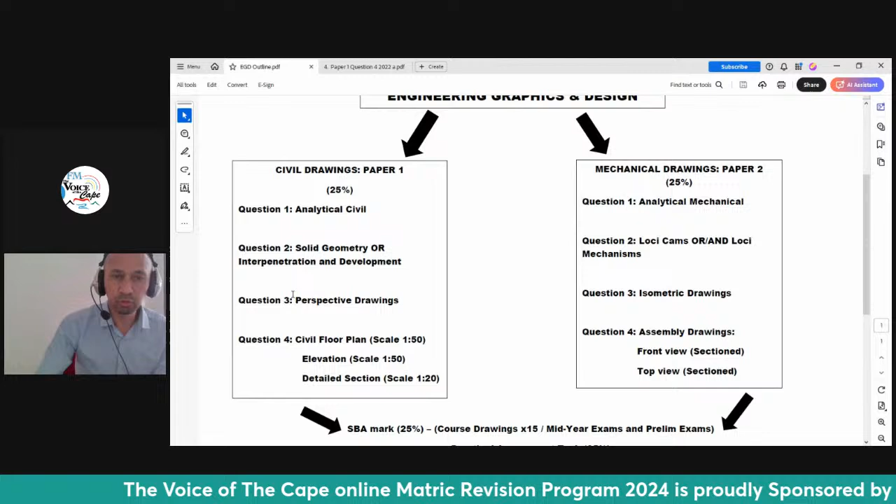All of these sessions we have gone through question 1, question 2, question 3, and we've taken a little bit of time to work on question 4, as question 4 has a magnitude of 90 to 95 marks, which is slightly short of 50% of the paper. And that is the reason why we are spending so much time on this specific one. And you will see that question 4 has 3 parts: civil floor plan, elevations, both to scale 1:50. And today we are finishing off with a detailed section of 1:20.

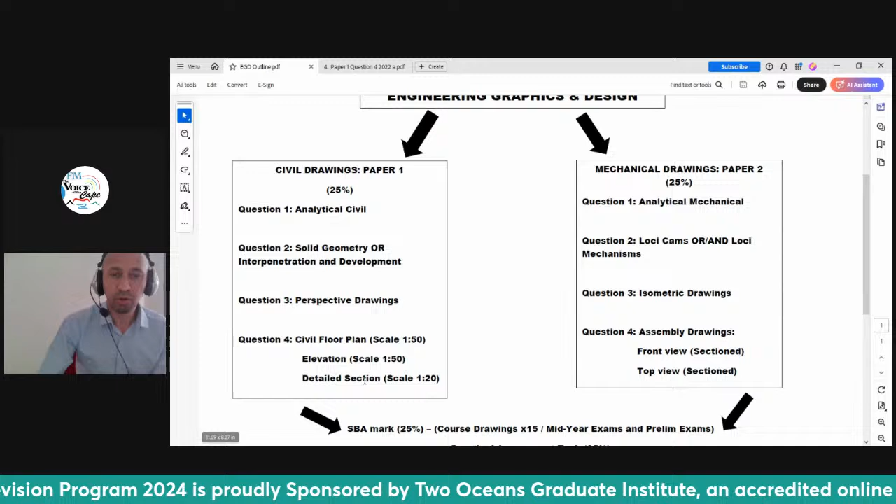One of the parts of this particular question that is normally not very well answered is specifically the roof. And I'm hoping that you will pick up a few tips today to be able to make sure that you complete this part of this particular section of question 4. Okay, I'm going to just move to the question paper that I'm using, and please, if you can download this paper, it is the 2018 paper, which I'm using as an example, and just to revise through this paper to ensure that you are well on track and prepared.

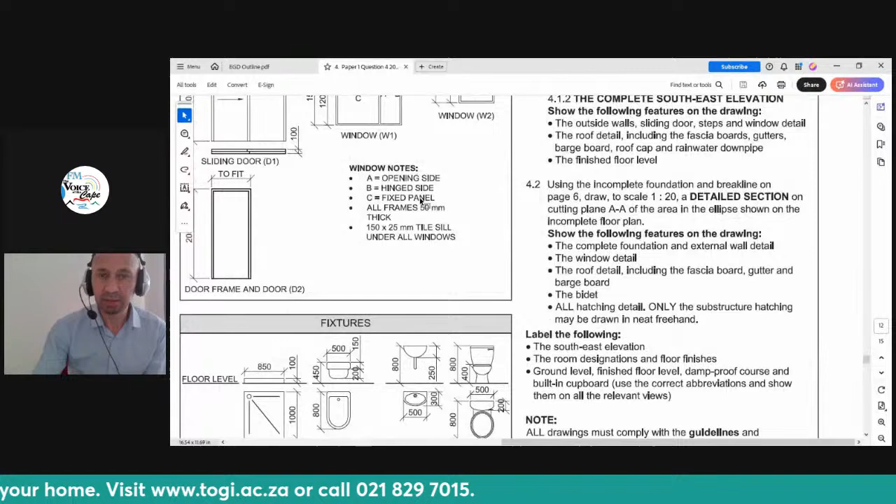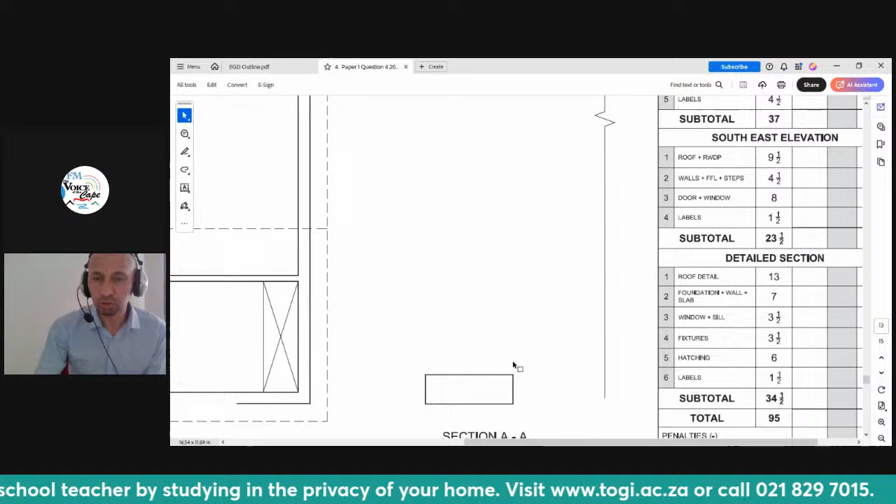Now, you will see that we will be covering 4.2 today, of which we've done 4.1 last week and the week before, 4.1.1 and 4.1.2. Here we have using the incomplete foundation and break line on page 6, and that is going to be the page that you will see right over here. Just to take you to that page, that is page 6. There's the break line. Yes, here's the break line. Sorry, I just want to take you there. That's the break line and the foundation. That is what we are talking about. That is on the page which you are going to draw.

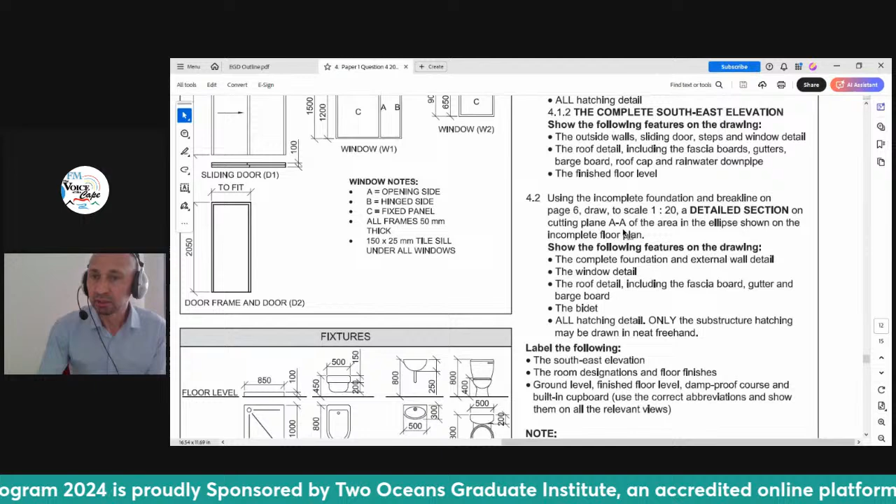And it states further that to a scale of 1:20, very importantly, we have a tendency of making the mistake of dividing everything by 50 because the previous ones are all 1:50, but this one is 1:20, which means it becomes a detailed section on cutting plane AA of the area in which the ellipse is shown on the incomplete floor plan. Now, you can either go and visit this side where the floor plan is, which is right there, or alternatively, you can go down to your actual drawing page, and you need to show everything from this point over here until that point over there.

And the fact that the arrows are pointed that way means that you are standing literally on this side here where my pencil is, and I'm looking, as my arrow indicated, into that space here. So everything in the backdrop here will also be seen, and that is sort of the higher order part of this particular section of the question.

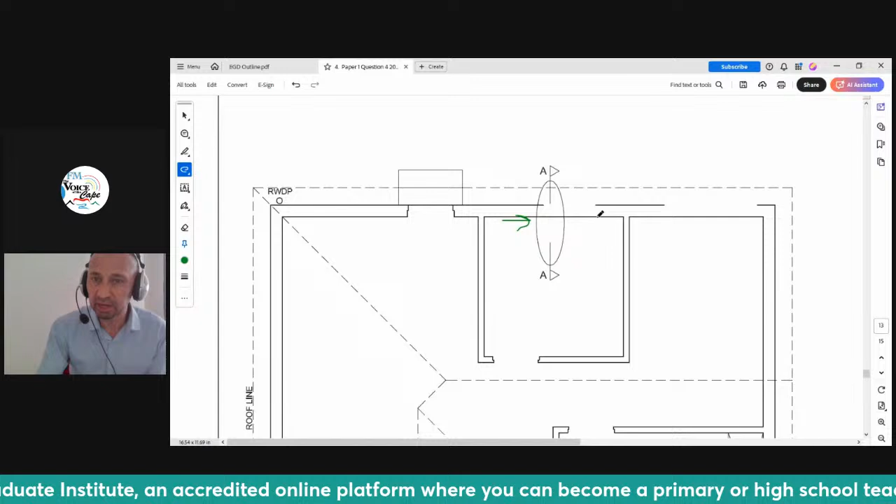So keep in mind, if those arrows flip this side, you will obviously have your movement to the opposite side of the pointing of the arrows to be able to see the view of which you need to indicate from that corner or that point to that point.

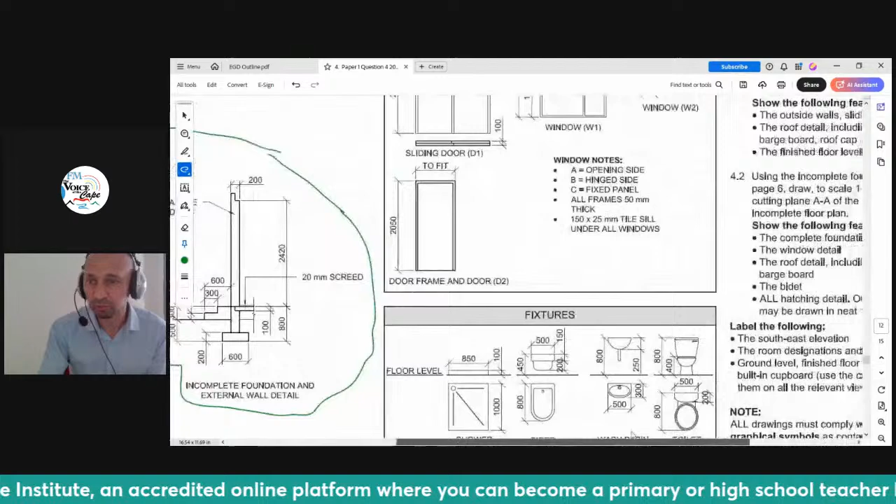Right, so if you go back to our instructions, you will see that you need to show the following features on the drawing, and that's going to be the complete foundation and external wall detail, right? And you are going to obviously start right here with all of that information that you have there and scale that down to 1:20. You need to show the window detail, and the window that it is going to be cut through is going to be window 2, which you will see there.

It cuts through window 2, and you have to go and find where my window 2 is. This is my window 2, so you're going to scale everything down by 20, specifically this drop of the window, right? And then you need to go to bulleted point 3, the roof detail, including the fascia board, gutter, and barge boards. This is a reflection of the roof, which we are going to do. And the roof detail, you're going to find here in your roof notes. So you need to familiarize yourself with that information over there.

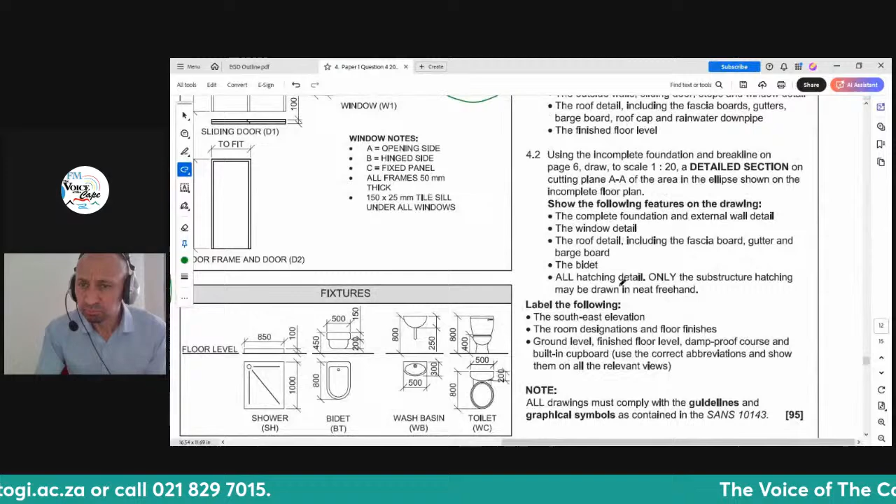Keep in mind that all of these measurements here that you see are real measurements, and that you have to divide it by 20. And then, of course, there will be a bidet in the background. Now, remember last week when we drew it, there was a bidet that you saw here in the backdrop, and that bidet must also now be brought into view because it forms part of the section that you will see there, right? And how are you going to get the bidet there?

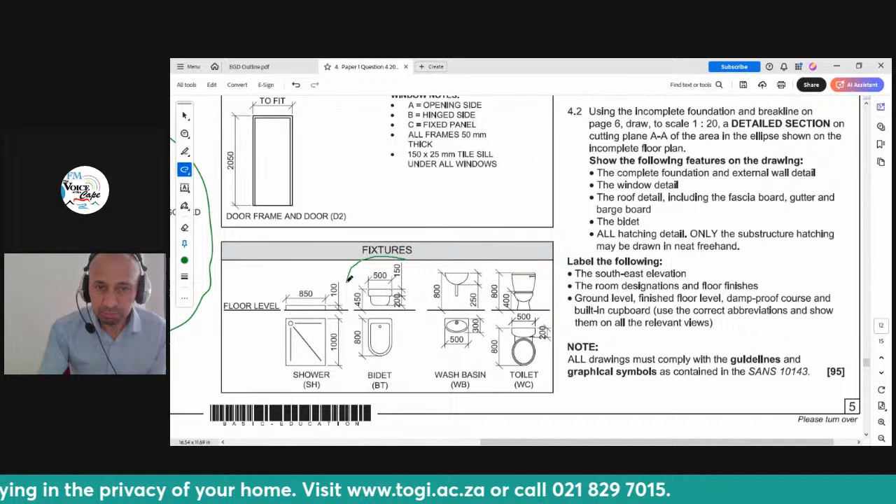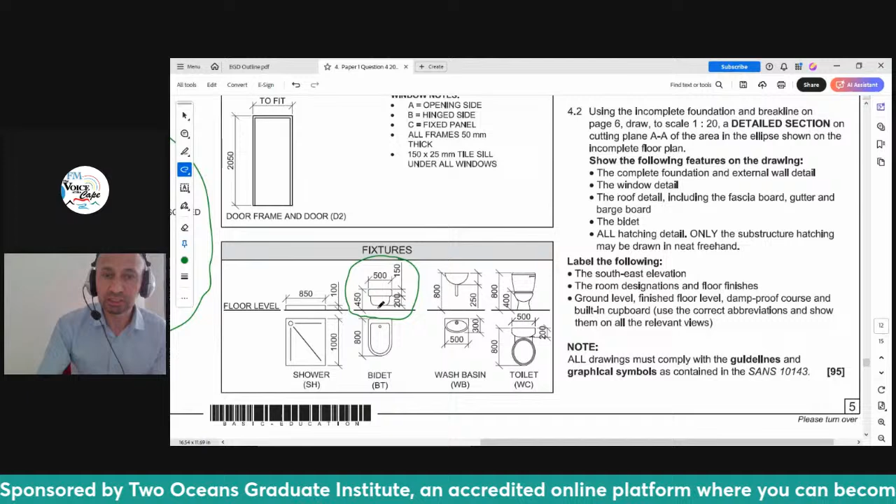You're going to go to your symbols, which you obviously have on your instruction page. Let me take you there. There is your bidet. So we're specifically going to look at that view over there because that shows the elevation of a bidet, not really this view here because that's already part of the floor plan. Remember, these are basically computerized drawings given on this page, but you cannot copy this drawing onto your page because these are not SANS symbols. You need to draw the actual SANS symbol, which I'm going to show you in a while.

And then you need to have all the hatching detail. Very importantly, only the substructure hatching may be drawn in neat freehand, which I will show you as well, right? And then all of that will conclude the detailed section. Now I'm going to stop that screening and I'm going to go over to my workstation, which you are going to see in a moment. And there you will see that I'm busy with my workstation on this side here. I've got my instruction page with me.

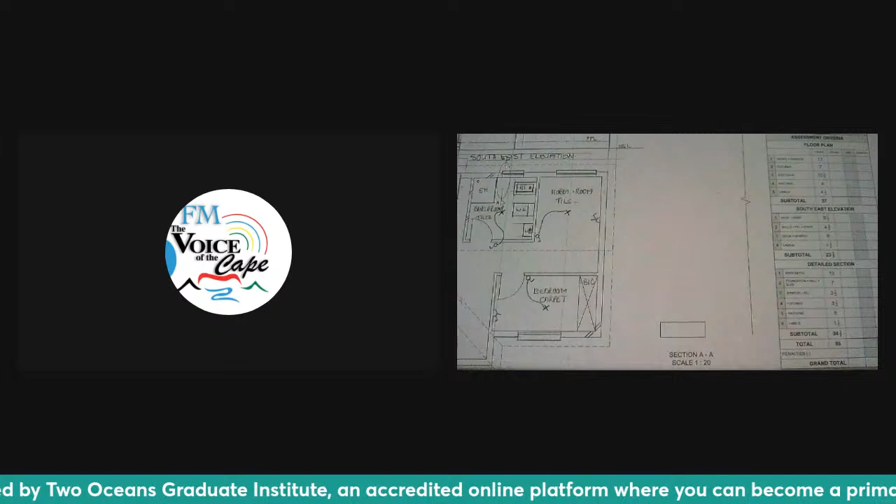The first thing that I'm going to do is I'm going to go to this over here. You will see that this part of my foundation already exists on my drawing. It's a given as a starting point. So I will have to take my calculator and divide all of these by 20 to be able to find the dimensions on this section here, which I need to draw. So what I am going to do is simply do that calculation quickly. And once I've done that calculation, I will be able to draw.

I've already done that. So I'm going to start with my wall. So that is 30 over there. I'm going to find the middle, which is 15. And then I'm going to go 5 on this side and 5 on that side, because my wall is actually 10 millimeters in thickness. I'm going to project that faintly up like that. And then I'm going to go to my different slab layers.

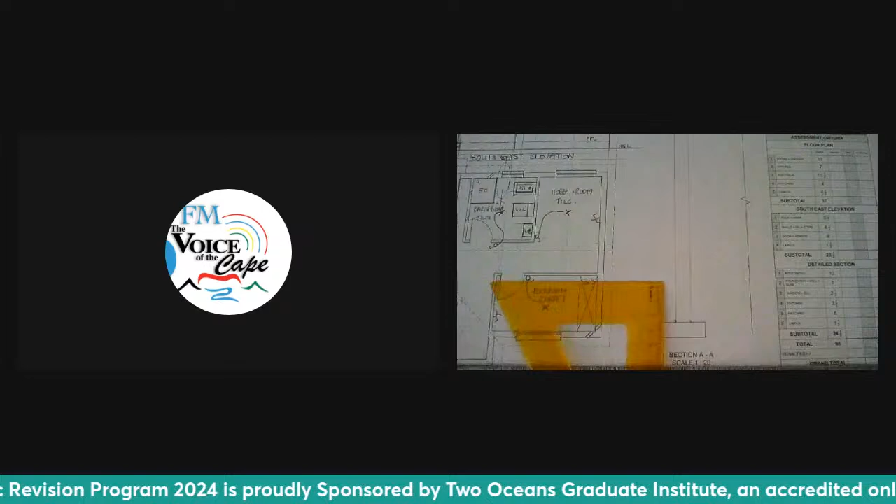I'm going to measure up from here, according to my instructions, 25 millimeters. So there I have my 20 plus my 5. That's going to be my 25 that I have there. And that 25 is going to be my natural ground level, which I will have there. And then on top of that 25, I'm going to measure 15.

And my 15 is going to be there. And there I've measured my 15. Now, what is important to understand is which side is going to be my inside of my house and which side is going to be my outside.

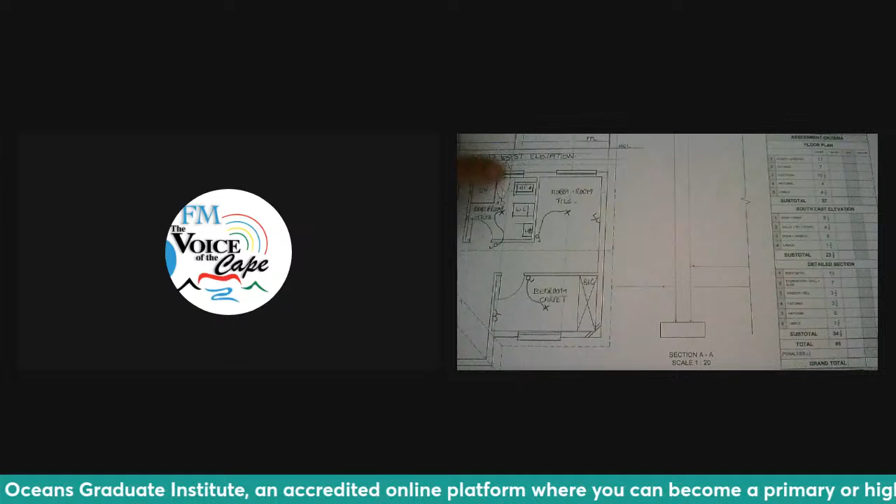Now, if this is your cut section that you see here, my cut section is there. So I'm taking literally that cut section and I'm flipping it like that, meaning that this part here is my inside, which is on my right-hand side here. So that's going to be my inside of my house. That's going to be my outside. So the inside of my house will have my floor finish with my different layers. As you can see, it develops here. The outside will only have my natural ground level as it is there.

And then I will have my slab according to my instructions. I'm going to go down with my slab. My slab is 5 millimeters, scaled down by the 20 scaling that I have. And you will see significantly that my slab actually goes halfway into the wall. So I'm going to put that halfway into the wall. Now I'm going to darken that slab.

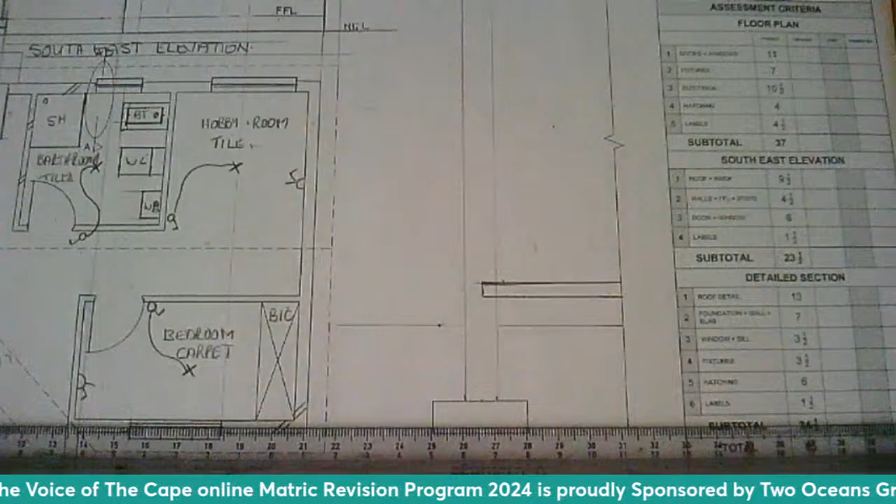Right, and I'm drawing as fast as I can because in the exam, neatness, unfortunately, is not a factor. We don't look at neatness. We look at accuracy. It doesn't matter if your drawing is not 100% neat. Accuracy is the most important thing. If you're going to focus on neatness and erase, you are going to waste a lot of time.

Of course, on top of that, there we will have screed of 1 millimeter apart. That is my screed that I have there. And then on top of that concrete slab, I'm going to have a thick line which forms my DPC. And remember, I'm going to write DPC there because I know that is my damp-proof course. Then I'm going to highlight my natural ground level, which I have here on both sides of my wall. And while I'm at it, I'm going to label that natural ground level as well.

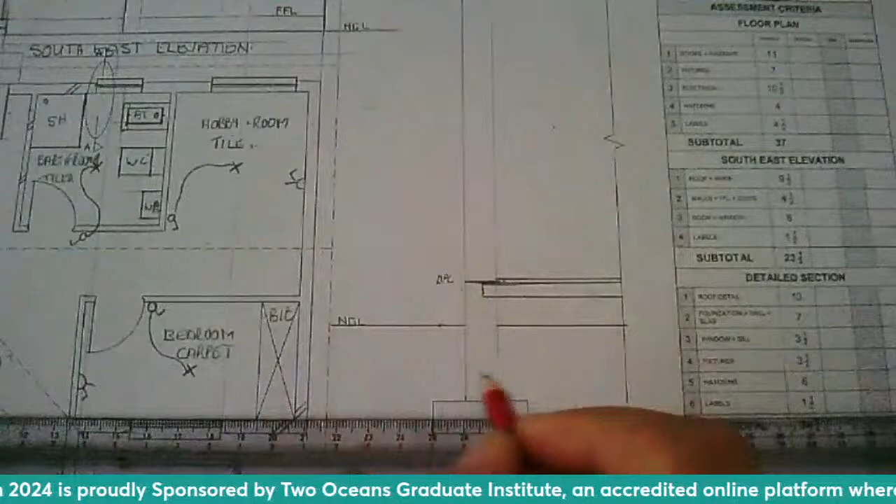Now, that forms basically my foundation. Now, while I'm at it, I can actually hatch that. So what I normally do is use my set square, but you don't need to use a set square. You can actually do it freehand, but it looks neater for me and more accurate when you do it with your drawing equipment, but nothing prevents you from drawing it freehand as indicated in your instruction page.

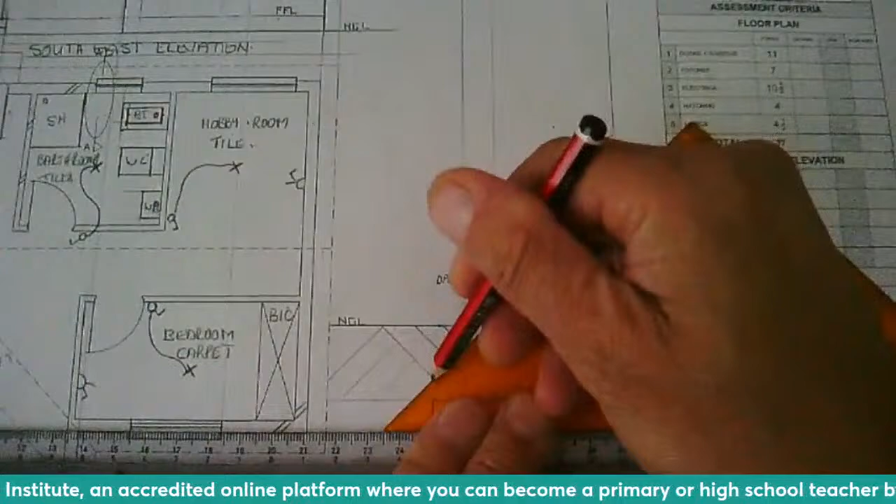So my earth is going to have lines going at 45 like that, and then it goes to the opposite direction, 45 like that. Now that's going to earn you a mark, and if you do it on the inside, 3 lines evenly spaced apart. We're not very pedantic as to the space of the lines, but you must keep it consistent once you start. So that's going to give you a mark each, on both sides of the wall. You will see my wall still remains faint because I need to add some detail on top, and once I've done that, I will darken my wall.

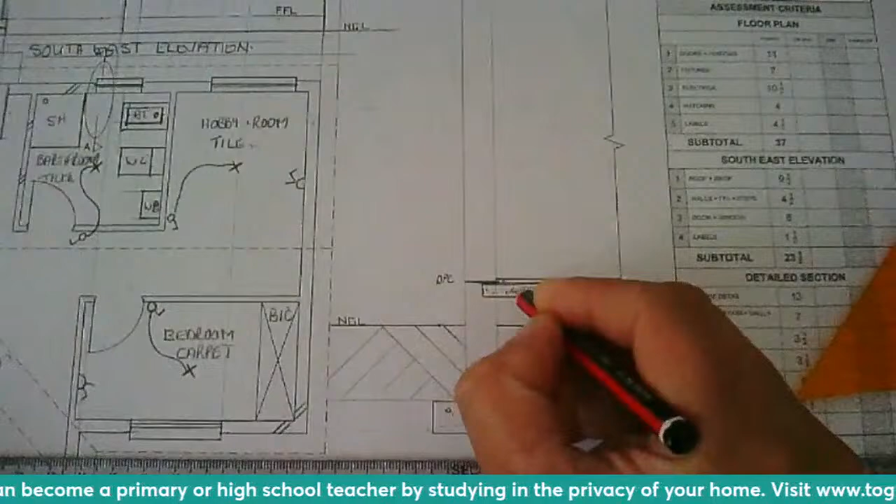And then, of course, my concrete would just be dots and triangles in the exam. So you can have a few triangles and dots. That is also concrete. So that will earn you the mark for hatching. Then you have your compacted hardcore. That's going to be 45 up, 45 down, 45 up, 45 down until you reach your break line, which is this line over here. Okay, that's your break line. So there I've got my compacted hardcore hatching.

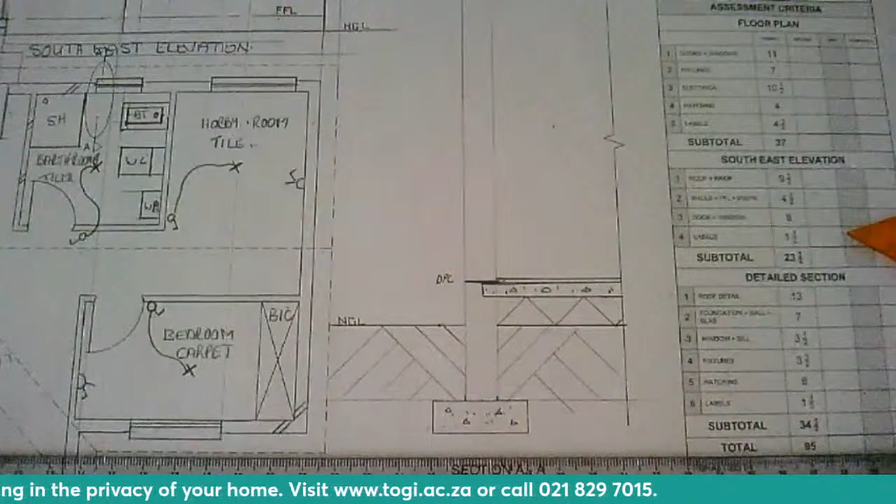I have my slab and I have my concrete foundation hatching in there as well as my earth on both sides of my wall. That section of my substructure has been completed. That is the one part which forms my foundation of my detailed section. What I'm going to do next is move up and put in my window which I'm cutting through. So I'm just going to move this slightly up like that so that you can see what I'm doing.

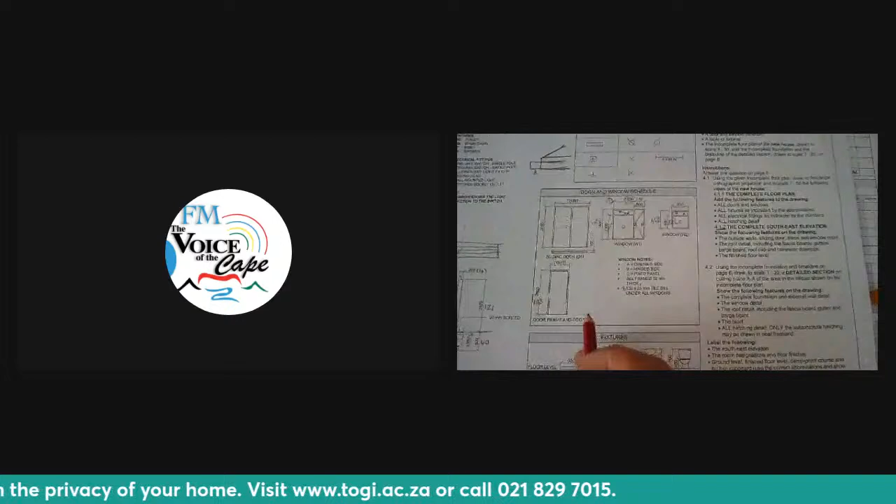Right. Now, when I look at my instruction, it tells me that there has to be a window in here, but how high is the window? Because on top of my window, you are going to see that there's going to be a lintel, and lintels appear on all doors and windows. But how high? What you need to do is to go to your window and door schedule, because your height of your door and your window would be the same.

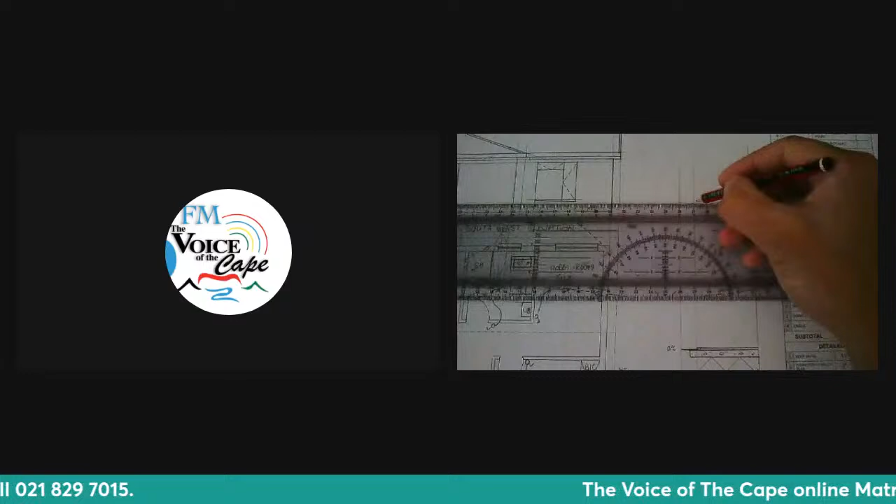So if you look at your height of your door, it's going to be 2050 divided by 20, which is going to give you 103 millimeters. So on top of my finished floor level, I'm going to measure 103. So 103 is going to be right there. I'm going to mark it and I'm going to draw a line faintly there. I just want to extend this a little bit faintly to the top. So you are going to see now, grade 12s, that is the top of my window, or if you have a door, that's the top of my door.

On top of that height, you're going to have your lintel, which is going to be 200 by 80. Now the 200 would be across here, which divided by 20 will give you 10. And 80 divided by 20 is going to give you 4. So all you need to do is to measure 4 above that lintel, like that. And you need to create the top of that lintel.

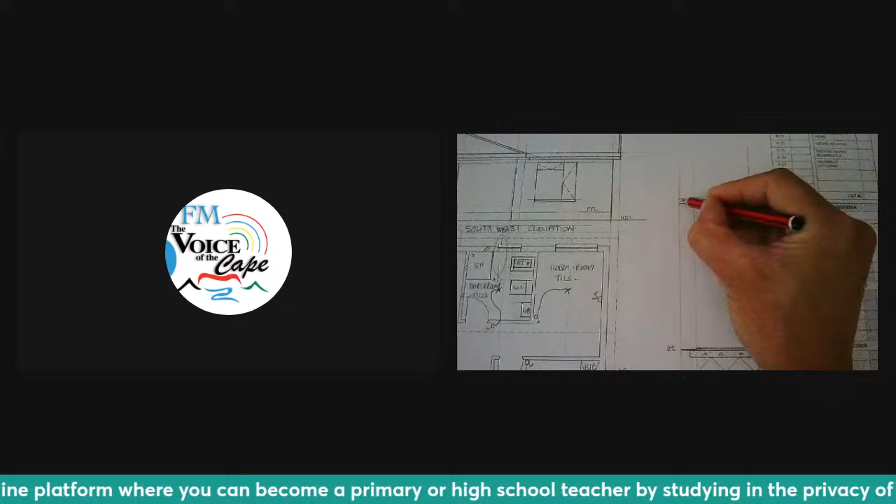The lintel would normally split in half. In some cases, it's one thick lintel. In other cases, it must be split in half because it's 2 lintels that will cover over the opening of a door or window in a load-bearing wall, which is a double wall. So they are split in half. And remember, the lintel is also made of concrete. So you are going to have dots and maybe 1 or 2 triangles in there, which will give you the hatching mark for that specific section.

Then you, of course, know that this is the window that you are cutting through, which is window 2, which you've already established there. And you need to just find the drop of the window, which is 900 divided by 20, going to give you 45. So the drop of the window will be under the lintel, drop 45 millimeters, which is there. I'm going to draw a faint line, just there. That's my drop of my window.

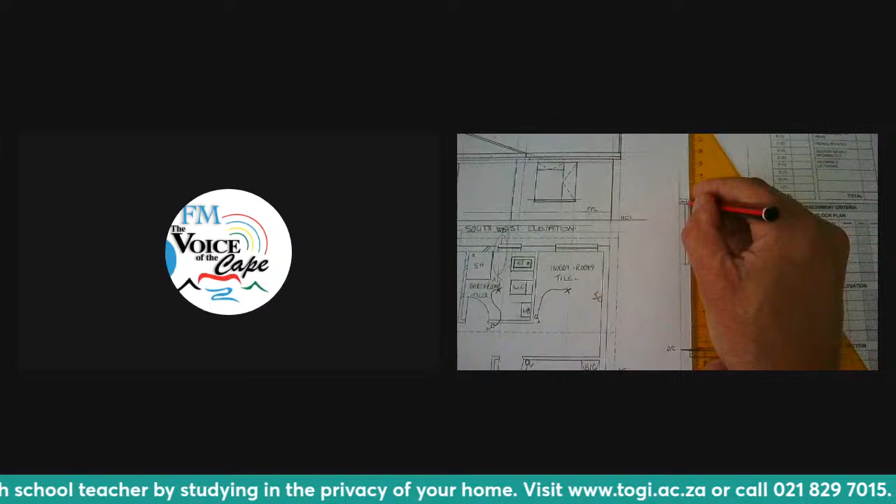But I need to indicate my window frame. So I'm going to draw 2 lines in the middle of my wall. Now, there's no specific measurements for the window frame, but it has to be perfectly in the middle of the wall, which will indicate your window frame. And then, of course, this is the outside. So a window has a window sill here, and it has a window sill on the inside. The window sill on the inside will just be the line that you will see there. But the window sill on the outside is a little slab that you will find the detail of right there where it says window notes.

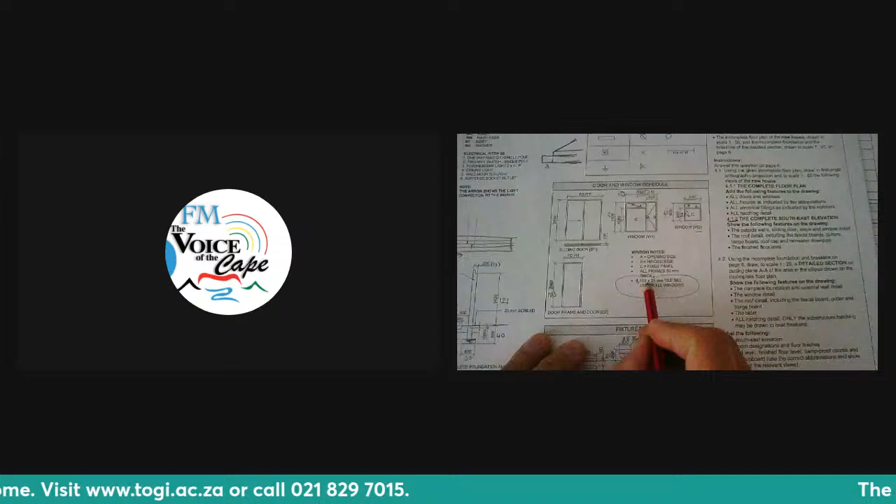So you will read 150 times 25 millimeters tile sill under the windows. So with the real measurements, you need to divide that by 20. 150 divided by 20 is going to give you 7.5. We round it off to 8. And 25 divided by 20 is going to give you 1.25; we can round that off to 1 millimeter because it's less than 5. And the angle that you're going to be drawing it on is going to be 30 degrees. Now, please pay attention how this is drawn.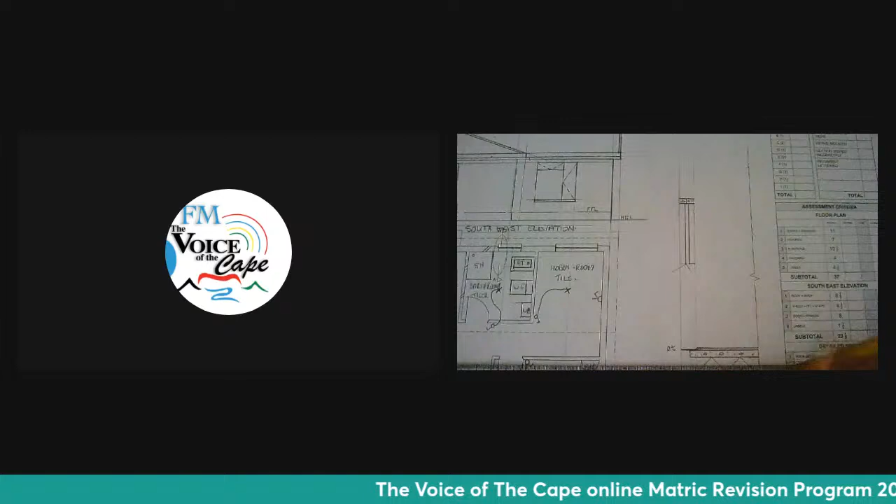So I'm going to go to the outside line of my window frame, and I'm going to draw a 30-degree line like that there. Because that's 30 degrees, I can flip my set square like that and draw a 90-degree angle at that specific corner. And then you are going to have your 8 millimeters to get your length. So there's my 8. It slightly surpasses the window. And this side, I'm going to have my 1 millimeter, which is going to be right there. And now simply, I can just draw my window sill and complete that by darkening the top and bottom and front and back, right?

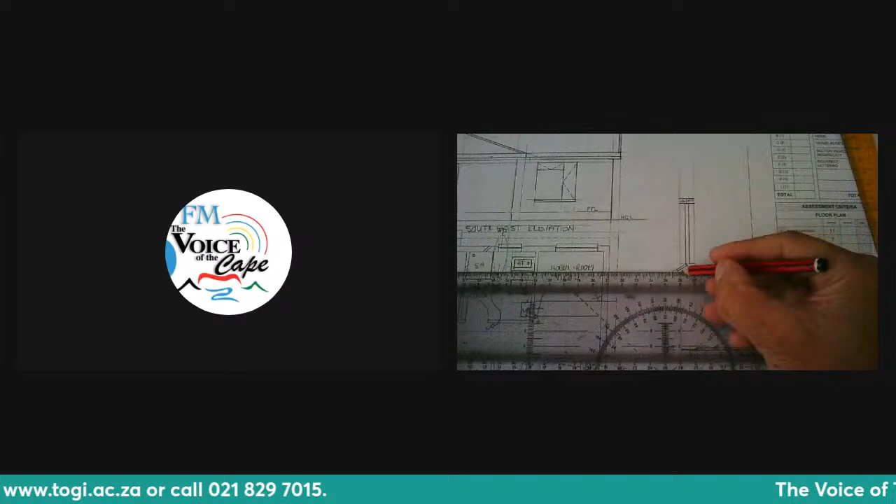And then once I have that, where the window sill crosses the wall line, I'm going to have a line going back there, and I'm going to have a line coming down like that, like a triangle. And I'm going to darken that. And why do we have that? That is the section where you are going to have concrete which mounts the windowsill to the wall. So in that little space, you're going to have concrete as well.

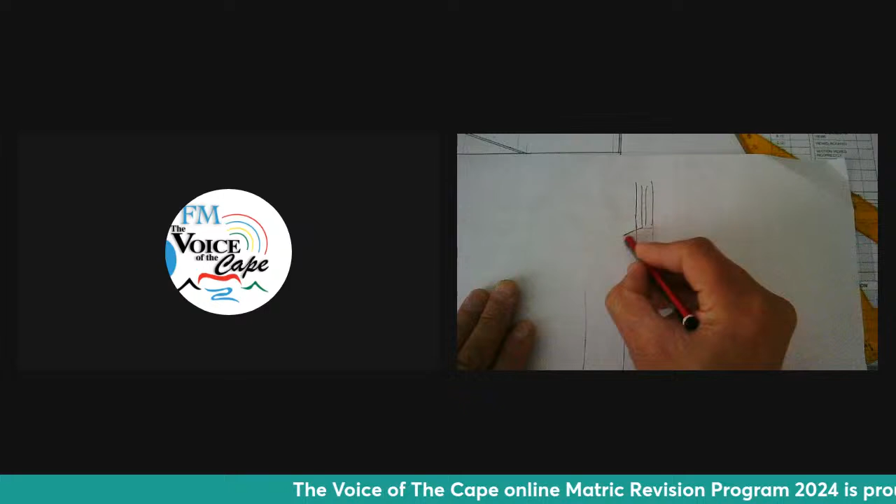But I just need to zoom into that section to show you what I was doing. So if that would be the window, right? And that is the windowsill that we have there. Then I draw a 30-degree line like that and a 60-degree line like that.

I add my 1 millimeter and my 8 to form my windowsill. And then I draw a line from there that way and a line down like that to form that little triangle that you see there.

So if you zoom in on that, this is what you see. That is your inside windowsill there. And you will have concrete in here, which must be done with dots and a triangle to give you the hatching mark. So that is basically what happens there.

Now you have concluded the window, so you can add your little dark lines there and just highlight what you still have faint. I will now slightly darken this up until the window top part, which is where my lintels are. So I'm going to draw that down like that there, and I'm going to draw that down, jump over my concrete surface bed, and just continue like that.

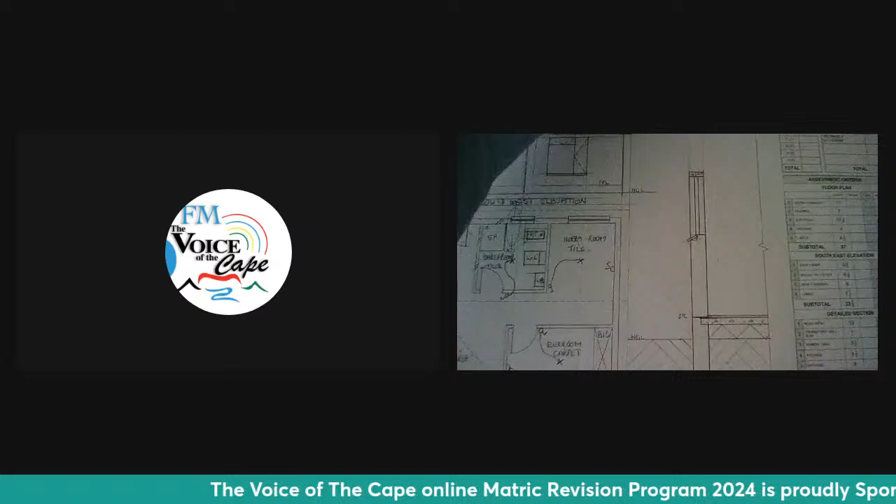So you can see now that is my wall. It's taking shape. I've done my window. I haven't done my hatching yet here. I'm going to leave that for a little bit later. And now the most important thing is that I have to put in my roof structure.

Now, this is very important how you're going to do the roof, because many learners don't actually attempt the roof in the examination, and very few of those who actually do get it spot on. So if you haven't tried this before, this is an ideal way of getting an understanding of how to interpret the roof.

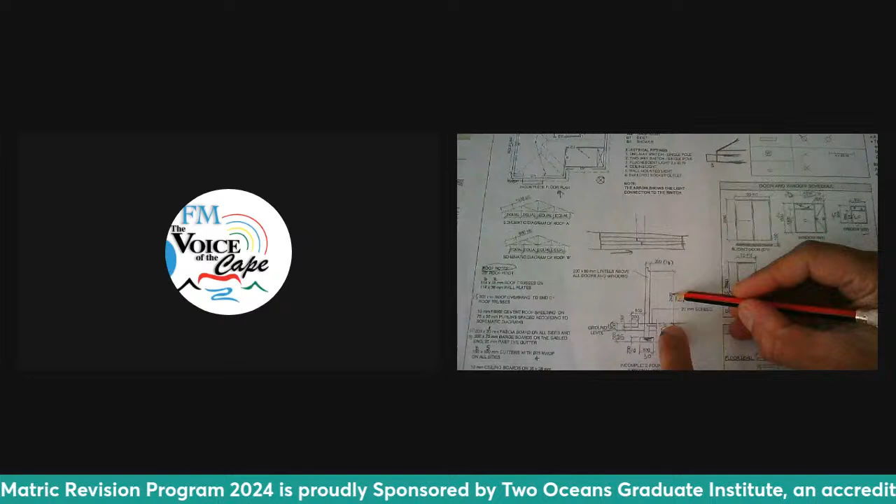So the first thing that I'm going to do, you need to get your height. You need to get this height here, which is from the floor finish, 2420 divided by 20 will give you 121. And that will form that part there. So 121 from my floor finish is going to be right there: 120, and 121 will be there. So now, by having that line, I'm going to draw a faint line till there. That's the first line I'm going to draw.

I'm going to zoom in on that section over there so that you can clearly see what I do. So that is my bottom line. I'm going to have a wall plate section into my wall here. Now, you will see that they speak about the wall plate in this section here. The wall plate is the piece of wood where the truss is basically situated on. It is the layer between the top of the wall and the bottom of the truss. And it is very similar to the wood of the truss, which is 114 by 38.

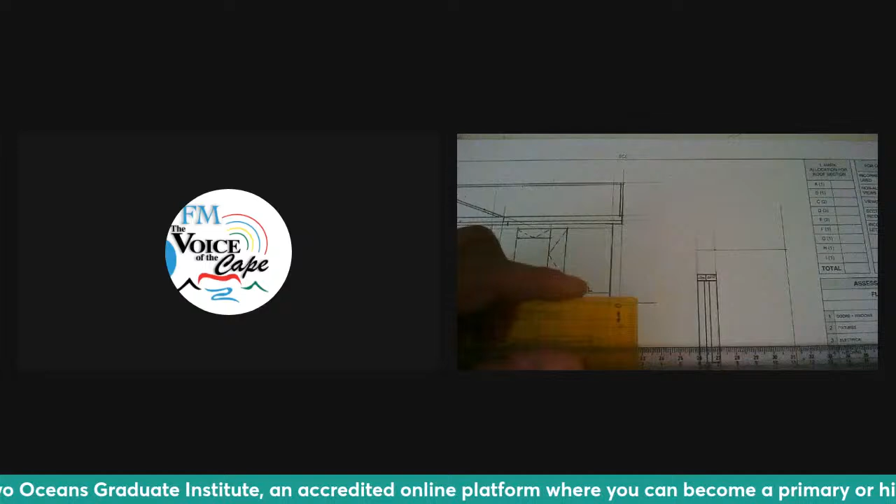So if you divide that wall plate, which is going to be situated right here, it's going to be 2 millimeters up. It is standard measurements, a standard procedure, which basically means that if you follow this before the exam, you can go in with preconceived knowledge and just execute the exam. So that line is my height line. On top of that line, I'm going to measure 2 millimeters there, and I'm going to draw another line right through. You will see I drew it right through.

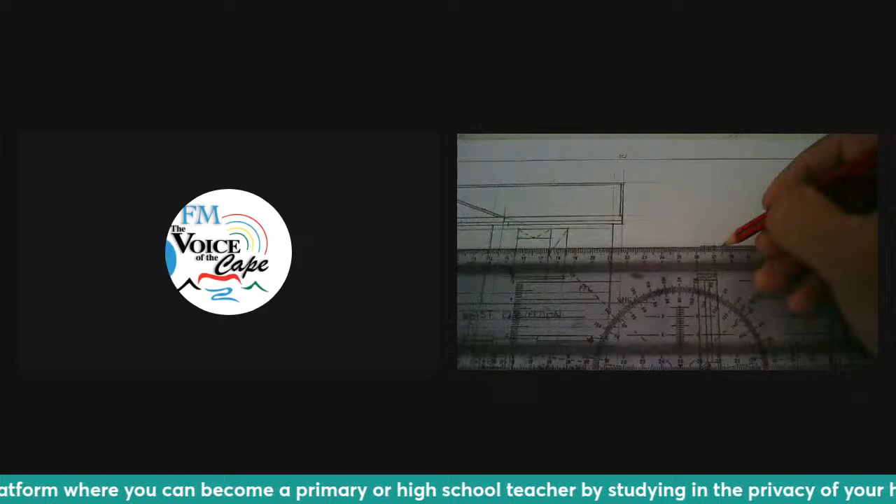And then from the inside of my wall, I'm going to measure 6 millimeters back. And that 6 millimeters that I'm measuring back will form part of my wall plate. So I'm darkening the top and bottom of my wall plate, right there. That is a piece of wood that is situated on top of my wall. So I'm going to darken my wall till there. So there you will see, that is my wall plate there.

And the hatching for wood is just a cross. And there I'm drawing it with a cross inside my wood section. And you're going to get a mark for that as the hatching for wood.

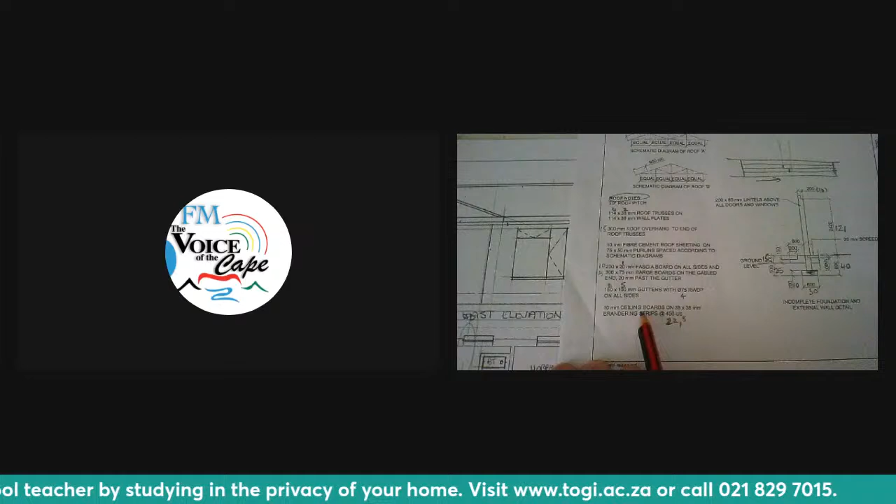Now, the wall plate and the brandering. If we talk about brandering, that's the wood strips that actually keep the ceiling up. The ceiling board is nailed to the brandering strips, right? And the brandering is 38 by 38. If you divide that by 20, you're going to get 2 millimeters by 2. So it's a square piece of brandering. And where does it fit in? It fits into this space here, into that gap there.

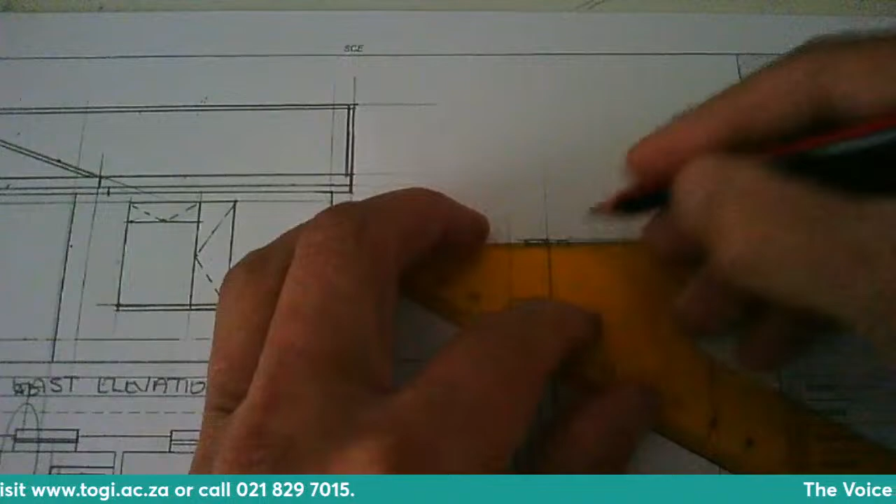So what you need to do is to create the first brandering. I'm going to draw my first line any distance away here from my wall, and then I'm going to measure 2 millimeters, which is very small detail, and draw a line there. And now I can just darken the top and the bottom of my brandering. And remember, I'm going to cross that because that's my hatching.

There I've got my first brandering. Right? Now that brandering needs a partner. You need to show 2 brandering strips, at least, only 2, because 1 mark will be for the brandering and 1 mark will be for the space in between. And they give you the space here. You just need to go and read it.

They say 10 millimeter ceiling board on 38 by 38, which is now 2 by 2 brandering strips at 450 cc, center to center. So the next brandering strip is going to be 450 divided by 20, which is going to give you 22 and a half. And you can round it off to 23, and I'm just going to measure from the center, the crossing to the crossing, which is 23.

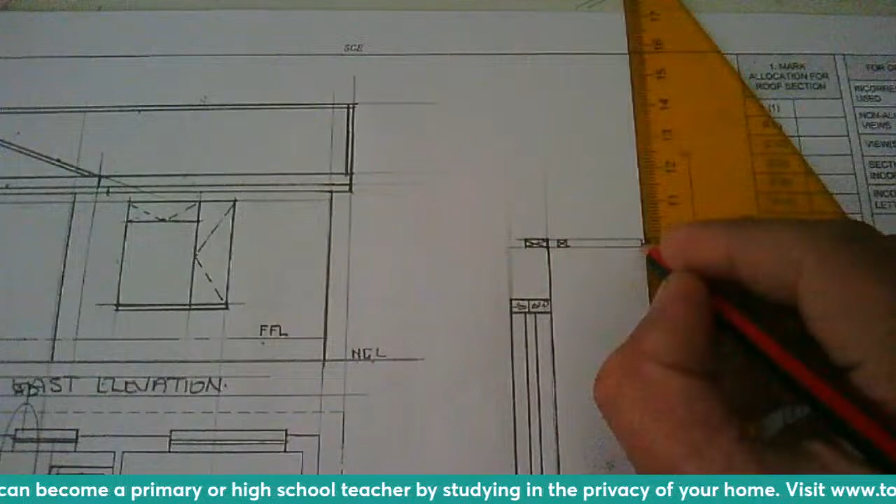There it is. And on both sides of my mark point, I'm going to draw a line, which means that I have now a 2 millimeter brandering strip, which is the second one. And I'm going to cross that like that there. So there are my 2 strips, right? And then the ceiling board will be the bottom.

I'm going to darken that, attached to my ceiling. My ceiling is attached to the brandering. There, it's nailed there or screwed there, and there you can see that is my ceiling. And my ceiling is so thin that I can just draw a dark line, and the dark line will actually allow me the mark for the brandering.

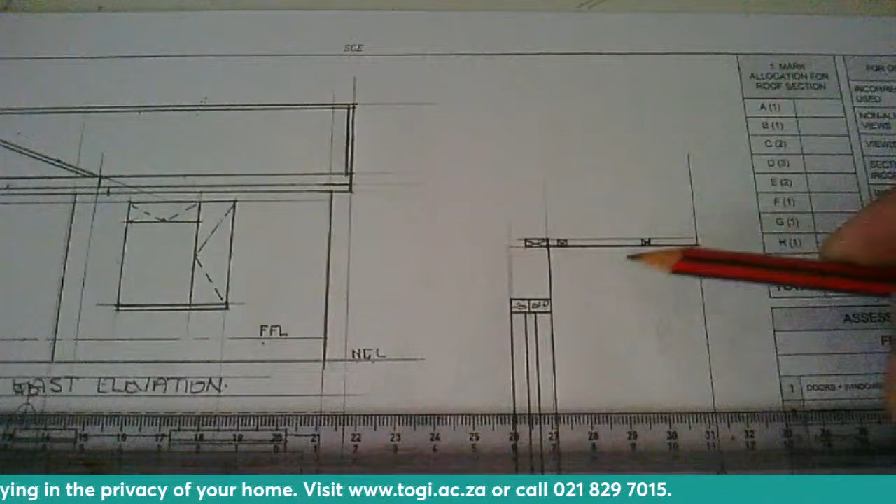Now I'm going to work on my truss. My truss now is this part here where the brandering will be attached to hold my ceiling. So if you look at my truss here, they speak about the truss being 114 by 38. We only need the 114, which is going to be 6 millimeters. So on top of that, we're going to have what we call a tie beam, 6 millimeters. So I'm going to measure 6 on top of this line here that you see, and draw a line faintly like that there.

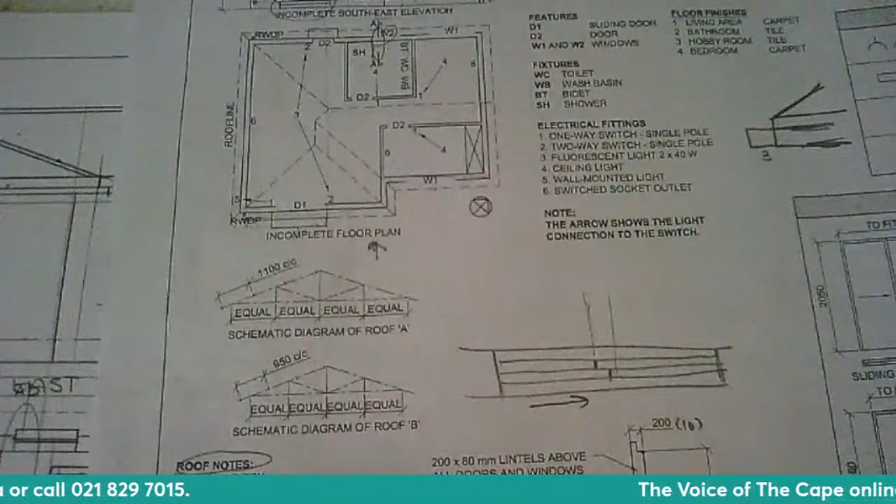Then we have the rafter, which is the angled part of my roof, which is that part over there, which you're going to see here. That's the angled part, which is going to be 114 as well, which is 6 millimeters. But the pitch of that angle is going to be 20 degrees.

Now you have to take your protractor. And where do you keep your protractor? You keep your protractor at the top left-hand corner, which is the inside corner, but the top of your wall plate. You've got to keep that perfectly there. Right? You can do it on your T-square. You can keep it perfectly there. And once you have it there, perfectly in the middle, then you can measure your angle, which is 20, and 20 is going to be right here. I'm going to mark 20.

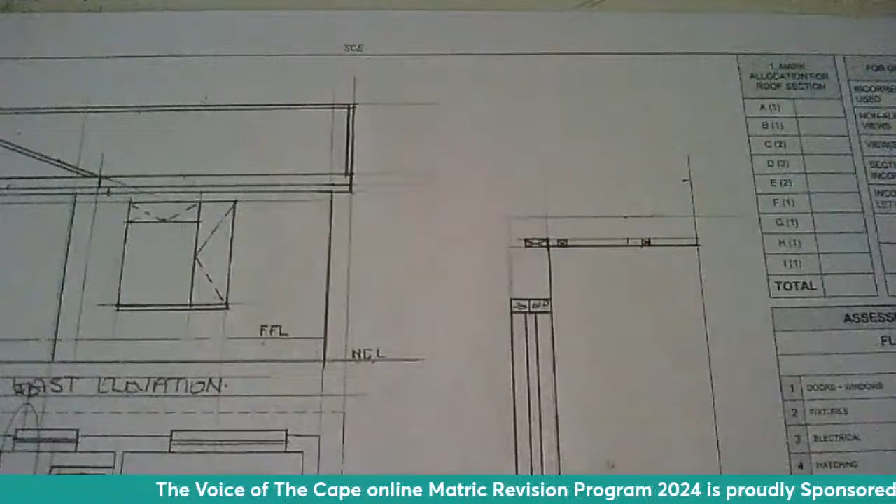And then I'm going to draw a line from where I anchored my point to the point where I marked it. And that's how I create my angle. Right? That is now 20 degrees. This angle is 20 degrees.

So on top of that, I need to measure 6, like I did here, to create the thickness of my rafter, which is part of my truss. So I'm going to put 6 there, and I'm going to do 6 millimeters there, and now I'm going to create my truss of 6. There it is. So you can see that.

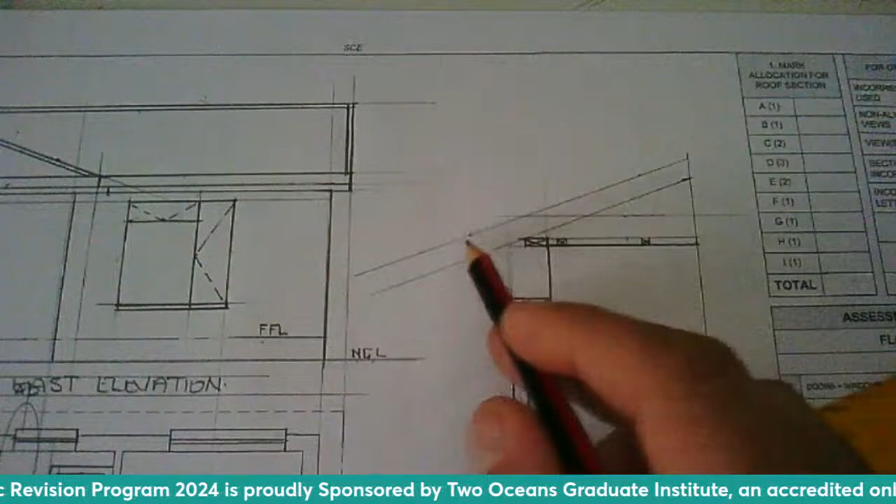And I'm drawing everything against my break line, so you can see how my truss forms. But now where do I cut it off? If you go back to your roof notes, it states here the roof overhang of 300 millimeters to the end of the roof truss. 300 millimeters divided by 20 is going to give you 15 millimeters.

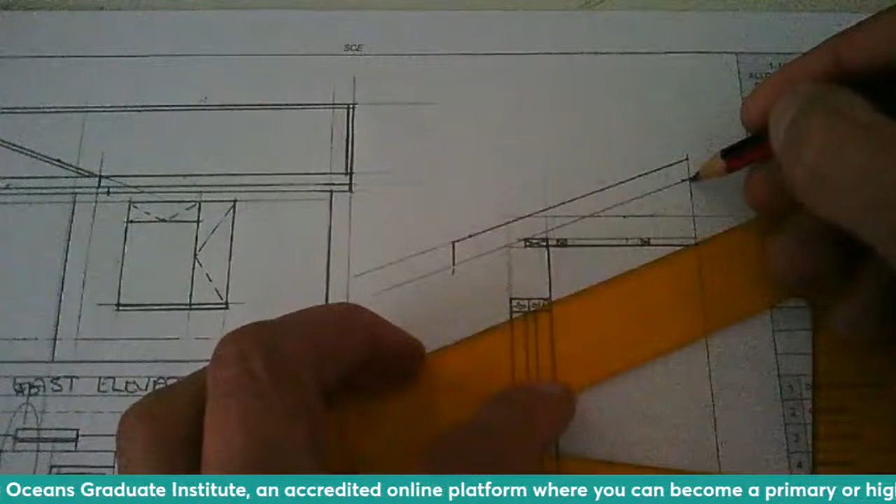So this is the outside. All I need to do is to measure 15 from the outside part of my wall. 15, there I mark my 15, and then I can cut off that roof truss there, which is my rafter. And then I'm going to darken the section. So there, where the cutoff of the overhang part is, you will see it there. And then I'm just going to darken this as well from there to there, so that you can clearly see how my truss is formed.

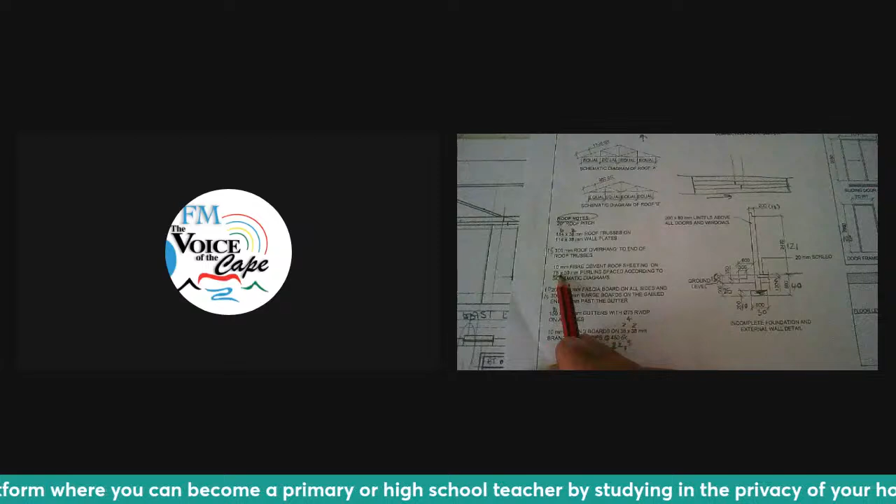Right. Now, grade 12, that is not the end of it. On top of my truss, you are going to have to put your purlins. And if you look here, it says 50 by 75 purlins, because you have sheeting on top of the roof, and the sheeting must be anchored to purlins, and it says here 75 by 50 purlins spaced according to the schematic diagram.

And that is the schematic diagram that you will see there. But we first need to create the space for it. And they will also say that the fiber cement sheeting is 10 millimeters. And of course, if you divide that by 20, it's very thin. It's literally a line that you are going to see as the sheeting.

But the 75 by 50 is going to be a piece of wood like this, where that height is 75 and this is 50 here. If you divide that by 20, you're going to get 4 millimeters here as your height, and 3 millimeters as the width across here. Okay, so that you have to place on top of your rafter of your roof truss. So I'm going to go and measure an additional 4 millimeters.

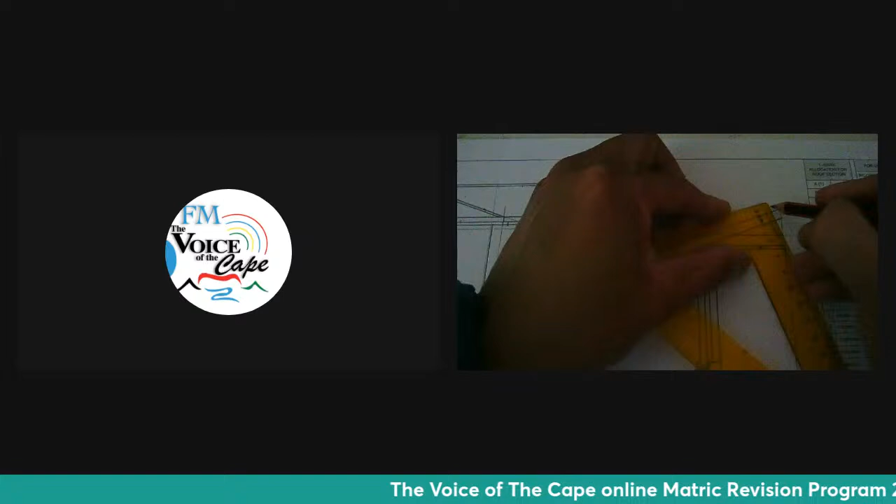So there's my 4, and I'm going to do another 4 this side, and there I will have my spacing. Do a faint line there. That's going to be my spacing for my purlins. Now remember, the first one I can draw anywhere, and because I have that on an angle, I can't draw it straight.

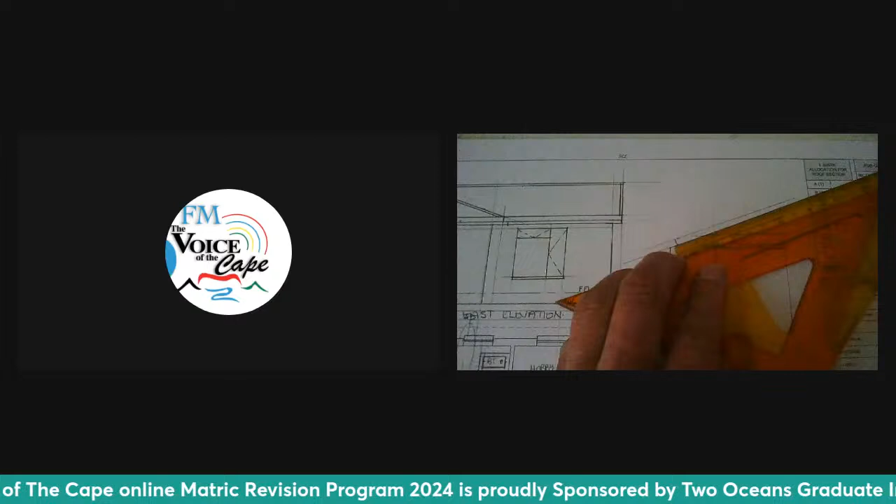So what I'm going to do is, because it's on an angle, I'm going to keep one of my set squares on an angle like that, and I'm going to put my first one here on an angle so that it forms a nice 90 degrees with my rafter. And then I said it must be 3 millimeters in thickness. There's my 3, and I'm going to draw that 3 millimeter line there and darken the top part, and then also just add my hatching, which is going to be a crossing there.

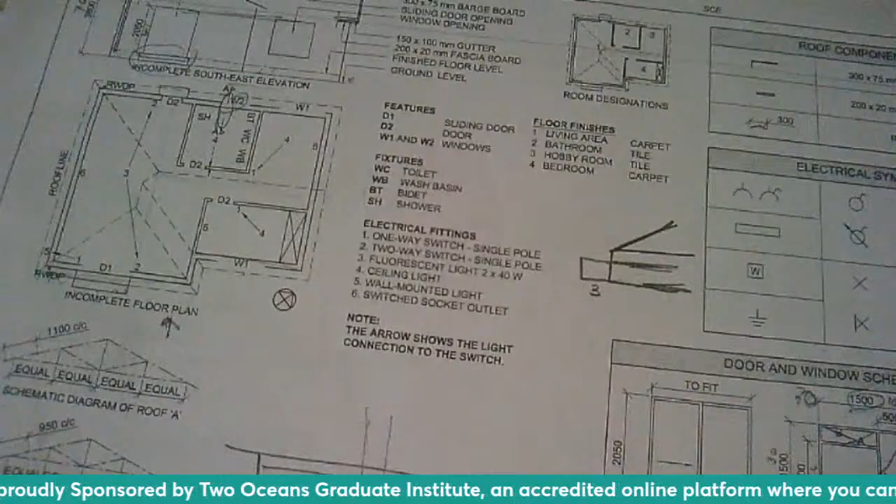All right, but remember, similarly like the branding, grade 12, you need to have at least 2 with the spacing. So if you go back to your diagram, you will find that the spacing here would be 950, right? And 950 you have to take onto your calculator and divide that by 20 as well. So 950 divided by 20, that's going to give you 47.5. I'm going to make it 48, rounded off to 48. So my gap between my 2 purlins is going to be 48.

From the center, 48, which is going to be right there. And then once I have that, I know that that's my center where I made the point, and I go 1.5 and 1.5, which will give me my 3. I'm going to take my set square again to keep it in line, and I'm simply going to draw the first line and my second line like that there, which gives me 3 millimeters. I'm going to close the top and do my hatching, and there I have my 2 purlins.

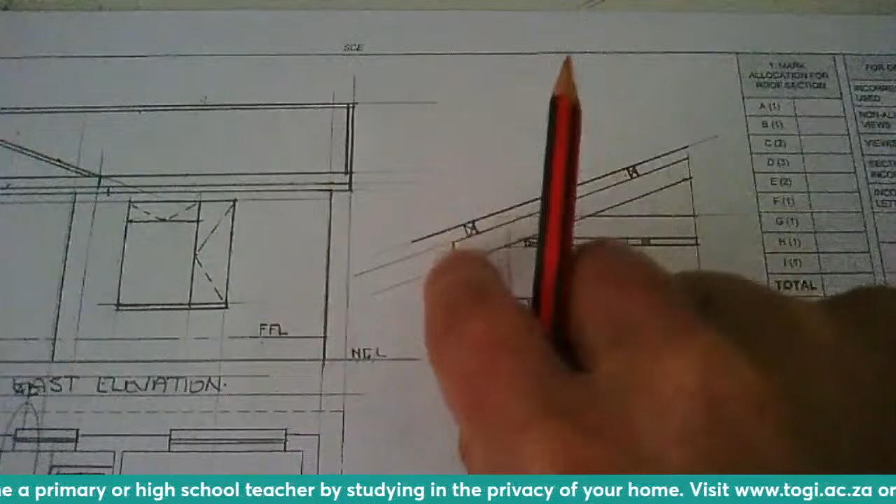What I can do now is just to add a dark line on top, which will represent my sheeting. And there's my sheeting, and my sheeting goes slightly further than the end of my rafter. So when it rains and water falls onto my sheeting, it has to go into a gutter, and we're going to draw the gutter. But the gutter is attached to a fascia board, and you will see here that the fascia board is 200 by 20, which is literally going to be 10 millimeters by 1 millimeter.

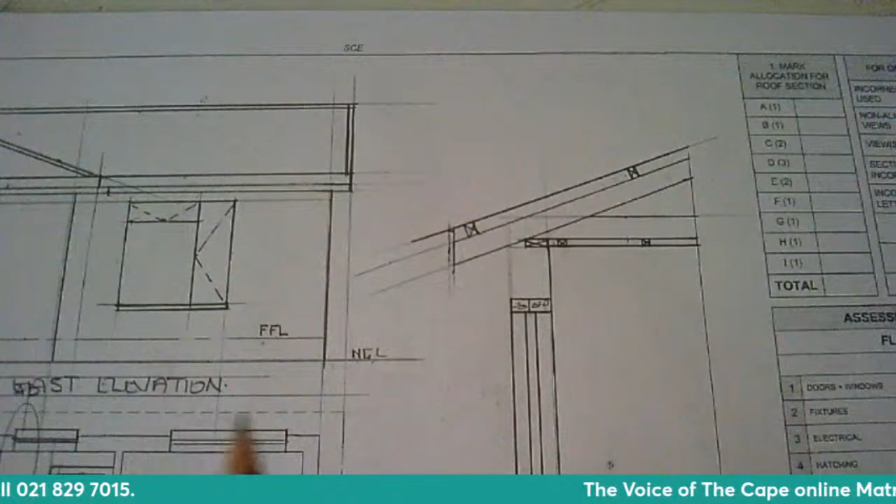And I'm going to draw a line there that the fascia board goes against the end of my rafter at the overhang, and I'm going to have to measure 1 millimeter thickness, because it's 20 divided by 20. There it is. And then I'm going to draw a straight line against my sheeting, which is the top of my fascia board. And my fascia board being 200 divided by 20 is going to give me 10 millimeters. So I'm going to measure 10 millimeters down, and there's my 10.

And there I have included my fascia board. Let me just highlight that a little bit. Make it dark for you so that you can see both sides of my fascia board. And there I have my fascia board. Then attached to my fascia board, you will continue reading the roof notes. There needs to be a gutter.

And the gutter, you will see, will be 150 by 100, which is 8 millimeters by 5, if you divide that by 20. So your gutter is going to look like that, where this is going to be 5 and that's going to be 8. So let's do that gutter. I'm going to have the gutter drawn anywhere in that space there.

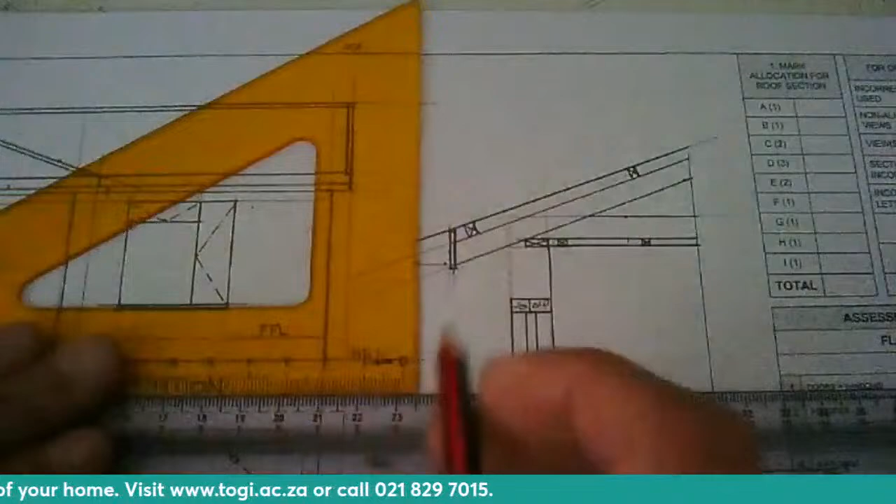So my bottom line is going to be my 8 line, which I'm going to measure off 8 millimeters. So that is my first point, and then 8 millimeters apart. And then I'm going to draw my sides, and you know my sides must be 5 millimeters in height. There is my 5 millimeters, and now I can just simply draw that gutter, the bottom and the top, and then of course I will have my side there.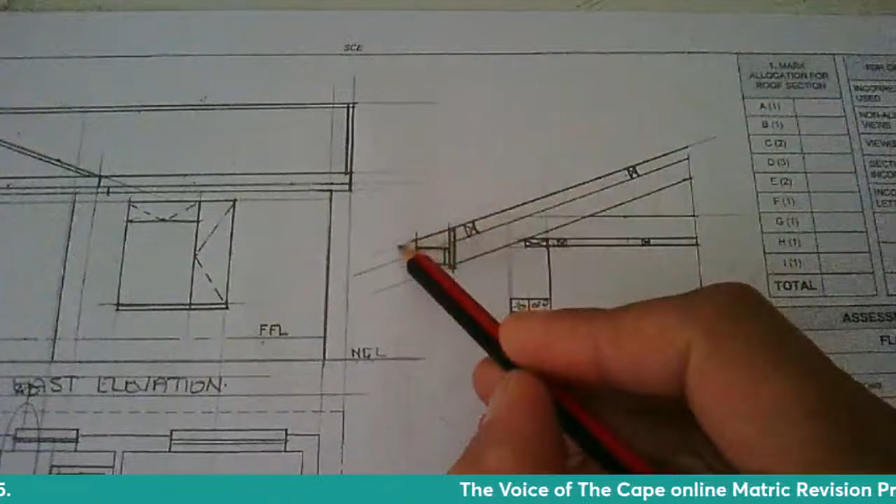And there's my gutter. And then the last part of this roof structure is going to be my barge boards, which is 300 by 75, 300 meaning that it is 15 millimeters divided by 20, and that is simply going to be the top of my barge boards. I'm going to draw a line slightly past my gutter, and 300 will be 15, which means that I will measure from here 15 till there, and maybe a 15 till here to make it nice and parallel.

And then I'm going to draw a line until it reaches my wall, and I'm going to draw a dark line there, and to close it off at the end of my barge boards. So that returns on the side, but I won't be able to see it because it stops where I have my wall. So that forms my barge boards there.

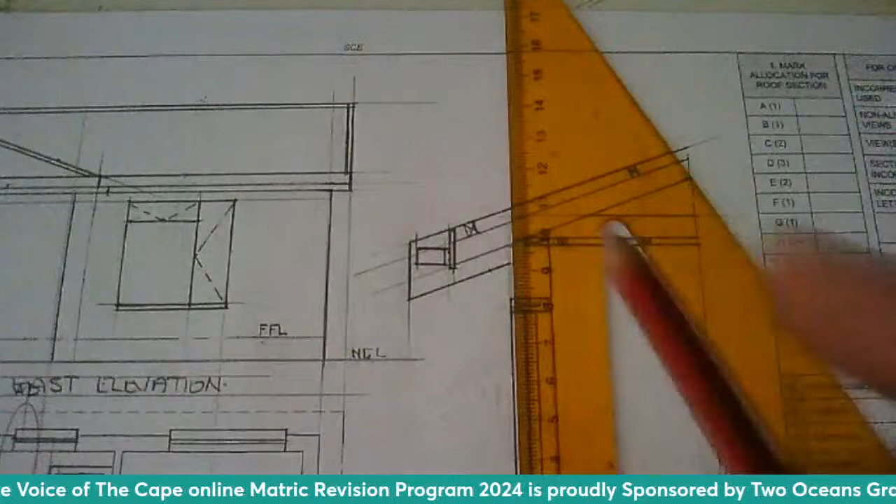And now I can just complete my top of my wall, which is going to be a line going straight up until it reaches my sheeting. I'm going to have the middle of that going up as well, and then this will come across to meet up with that middle, and I will just conclude by darkening that section there.

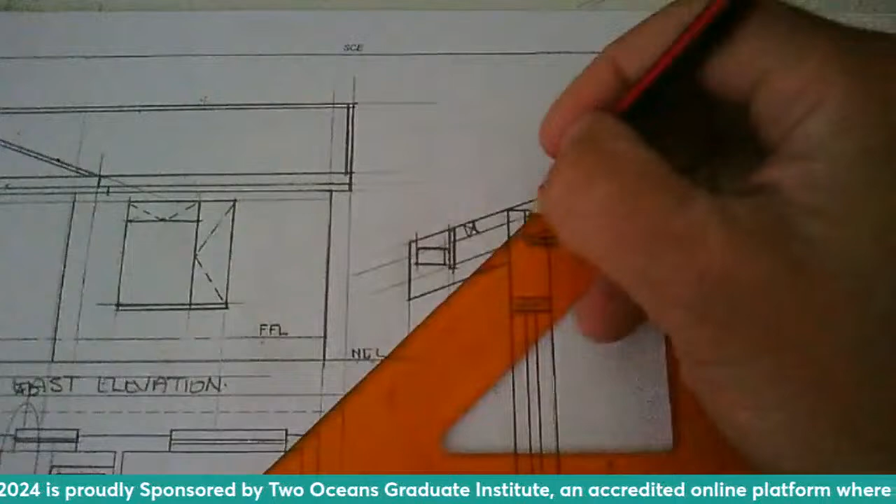Now grade 12s, my hatching needs to come in, and I'm going to bring in my hatching from the top. You will obviously clear this section because the roof is behind the wall. The roof truss is behind the wall, so my hatching will start here, 2 lines, gap, 2 lines, and you will continue right down, gap, 2 lines. Try and keep the spaces not too big, so that you can have even hatching going from the top right down. So that is going to score you the marks for the hatching that you will have here at the bottom section and at the top.

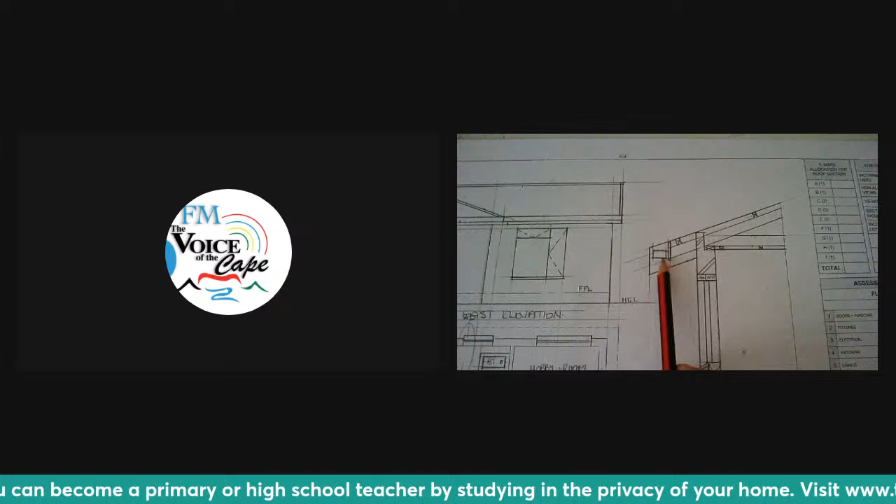And now, just before we conclude, there's one more part that comes in, which is going to be the bidet that you see at the back, because we've got the roof structure, everything is in the roof. We've got the barge boards, we've got the gutter, we've got the fascia board. Remember, the fascia board and the gutter can touch, or you can keep it a millimeter away, doesn't matter.

You have your 2 purlins, you have your 2 brandering, you have your truss, you have your wall plate, all of those things are there, and you have this section that goes up, which is your beam filling that you will have up until the sheeting, so that birds do not come into the roof and nest inside. And that's the reason why we are doing this right up until the sheeting.

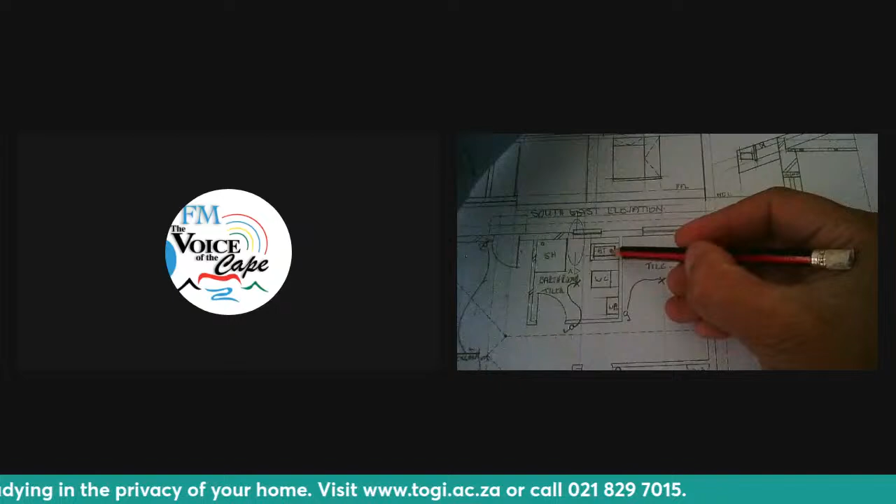So in the backdrop, as you will see here in my drawing, there will be a bidet that you will see at the back. Now, just to show you, if that bidet is here, you will have that symbol as the bidet, but the actual SANS symbol will look like this. Just to draw it for you very quickly, it's going to be that there, which is the top, and this part at the bottom here is the SANS symbol for the bidet. So you have to take these dimensions here, divide that by 20, so that you can draw that over there in the backdrop. But how far do you draw it away?

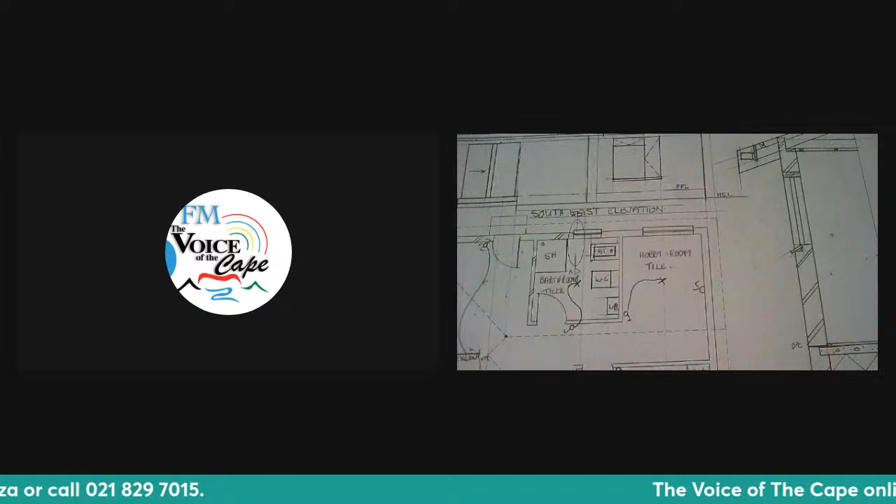So you need to measure this distance here where it starts from the inside wall to the start of the bidet. That distance, in this case, if I measure mine, is going to be like 4 millimeters. So I'm going to go to my calculator and say 4 millimeters times 50 to convert that back to the original size, and I'm going to have an answer which says 200, and then I divide that by 20 because I'm going to scale it down to this size, which is going to be 10. That means that now, grade 12, if I'm going to draw it here, I'm going to measure 10 away, and that's how far it's going to be from my wall.

Remember, you scaled it back, that distance times by 50 to get it back to the original size, which is 200, divided by 20, which is 10, which you scaled this down to the detail section. And now you will simply draw in your bidet, and your bidet size is going to be across 25. So it's going to be 25 across here, and I'm going to draw my 25 section there.

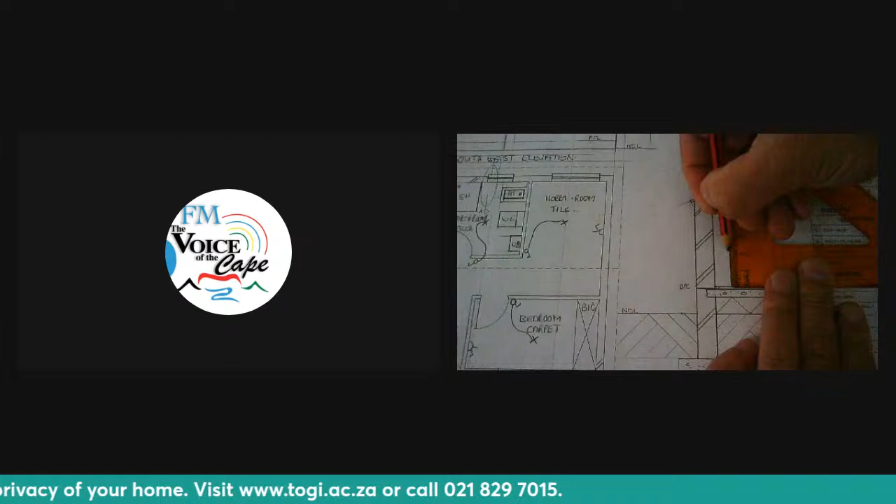And my height of my bidet is going to be 22 on the bottom. So there is going to be my 22 millimeters, just to make sure that I've got it right. 22. So I've got my 22 in there. And then if I look at my bidet, which I'm reading my measurements from here, it's going to be 150 down, divided by 20 is going to be 8 millimeters. So there's my 8.

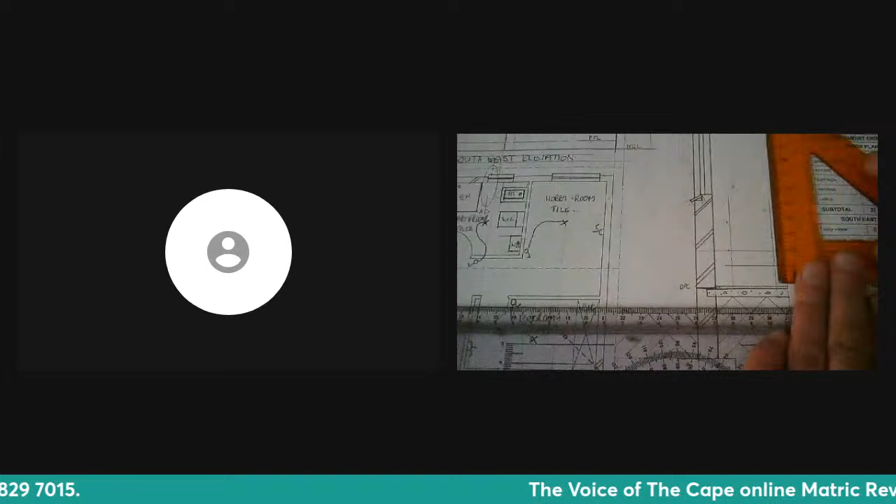I'm going to draw that top part. And then the other part that comes down is going to be 200, which divided by 20 is going to be 10. So that's going to be 10 millimeters, which I am going to have there. So I'm actually drawing the symbol that I've shown you, which is right there.

And then, of course, I also need to have the section, which is this part over here, which is literally not given to you. And remember, the rule states, if any dimension is not given, you must proportionally assume that dimension. And in this case, that dimension has not been given. So you are proportionally going to assume that by doing a 5 millimeters from this side and a 5 millimeters from this side.

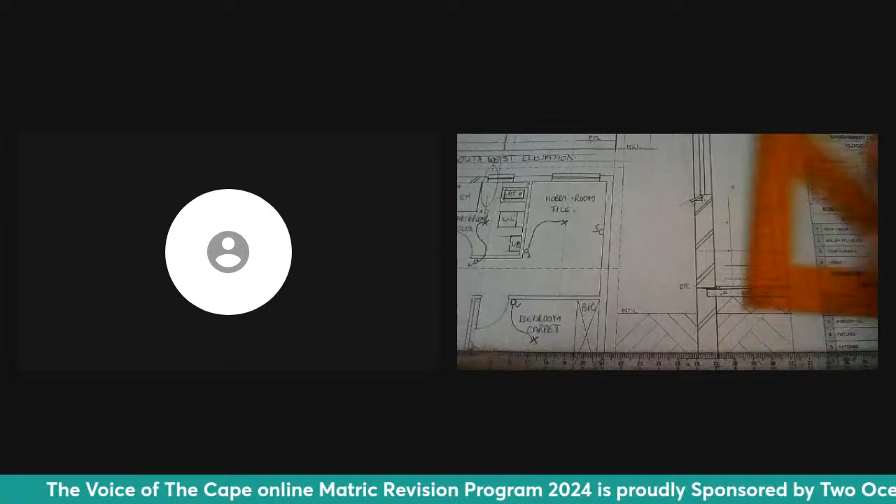And now I'm going to darken the sections of my bidet. All the vertical sides first, and then I'm going to draw my horizontal parts. And that is basically what I see at the back of my detail section, which is my bidet. And that literally completes the drawing. Everything that we have been instructed to do has been completed.

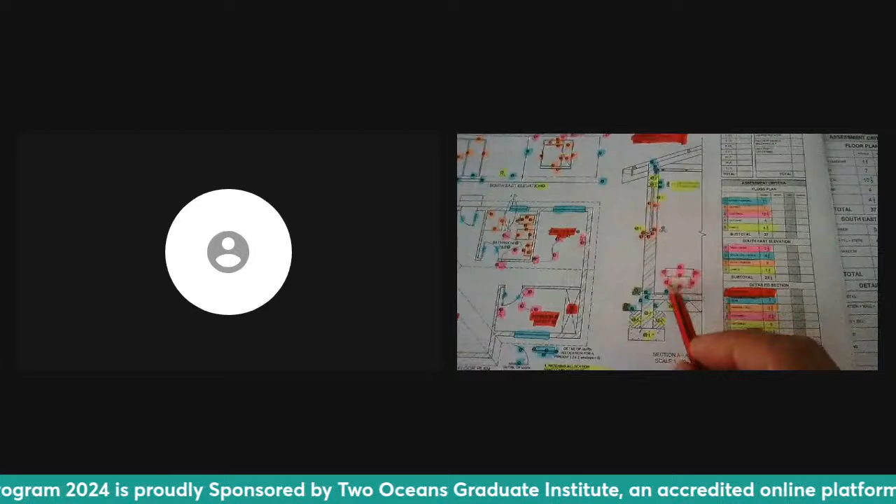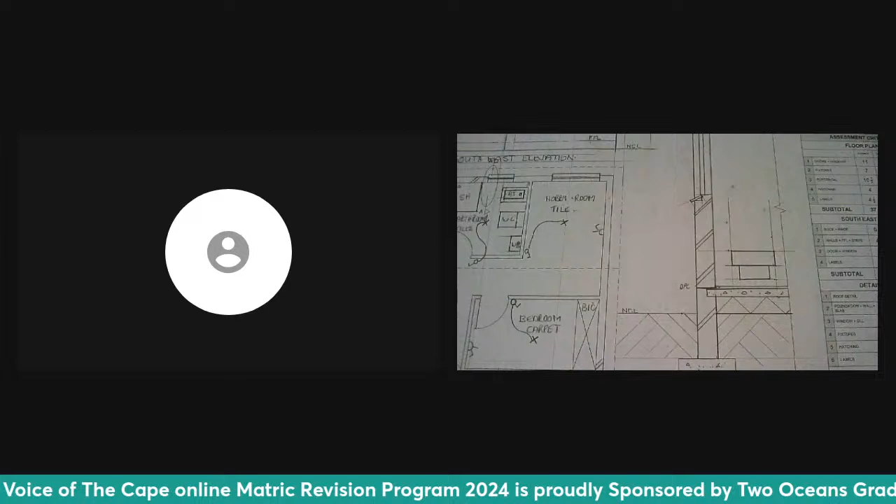So I hope you've taken heed of what I explained, the 3 sections, and that it will help you when it comes to this particular area in your NSC exam, which is your detailed section. And with that, I conclude. I hope you have benefited from this afternoon session, and I hope that it will help you when it comes to your NSC exam as well. The only thing that I can leave you with is to say practice, practice, practice until you get perfection out of it. Thank you very much.